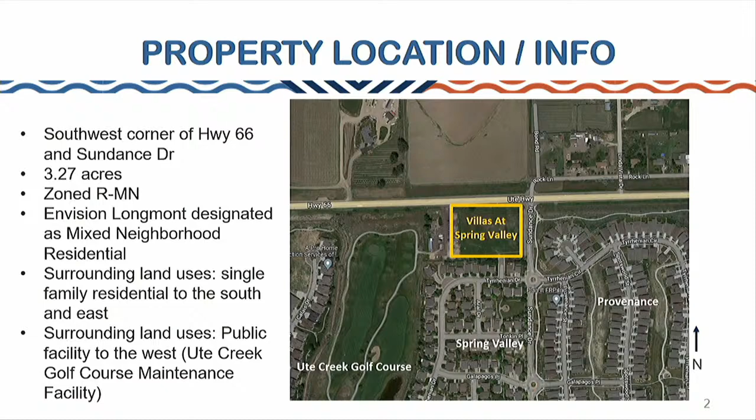Again, we're zoned residential mixed neighborhood. The original concept plan from 1999 called for 24 townhome lots, and you can see that concept up on your screen. That was with PUD R2 zoning, or at the time what was medium residential. In the current zoning district, we allow a maximum density of up to 18 dwelling units per acre. This project proposes 8 dwelling units per acre. Again, at 3.27 acres, they're allowed up to 58 dwelling units under the current zoning. This project proposes 28 dwelling units.

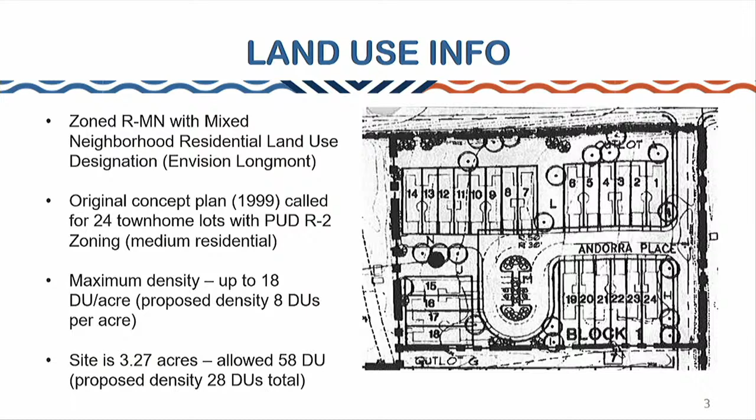So the request is for a preliminary plat of 28 residential lots for paired homes, so that'll be 2 lots to each one building. The lots range from 2,000 square feet in area to just under 3,000 square feet. In addition to the lots, we're looking at 17,000-ish square feet for a street that connects to Sundance Drive. At the end of that street is Tract A, which is a connection to the golf course maintenance facility. In addition to that, there's an open space tract going down the center. There's a landscape buffer area up to the north along Highway 66, and there is an internal tract, which is like the alley that they'll use for internal circulation.

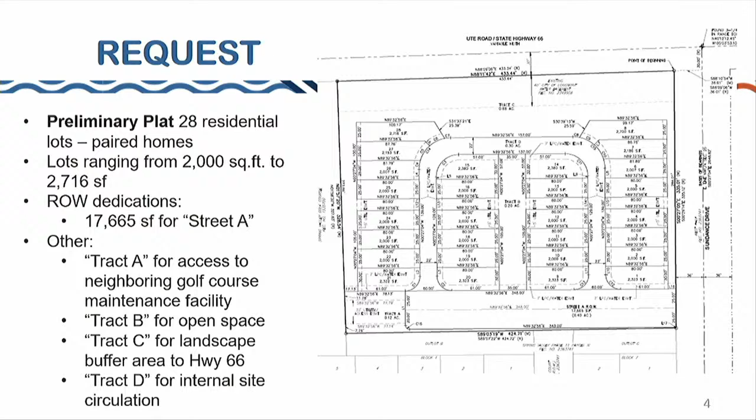Public outreach on this project: we had a virtual neighborhood meeting in September of '21. There were 3 attendees. In November of '21, we sent the notice of application for development. We did get comments from 16 members of the public on this notice. The vast majority of the concerns were specific to traffic impacts from the project. We again noticed the public hearing in October earlier this month, and with that notice, we did not receive any written comments from members of the public.

Development considerations from staff: we did find that the project meets the review criteria for a preliminary subdivision plat. The minimum standards for lot width are met. We don't actually have a lot standard for area in this zone district for this use. The proposed density aligns with the zoning, the comprehensive plan, and the previous original concept plan.

On the site, there's no federal or state protected species. I did want to mention there are a couple of raptor nests in the vicinity. One is an inactive osprey nest, the other is a red-tailed hawk that the species and habitat report didn't have any issues with or didn't expect any impacts. The other thing is there is inactive prairie dog habitat on the site, so if they develop between March and November, they'll have to provide a nest survey prior to coming in.

As always, you have three options to vote on this evening. The first is to vote to approve the Villas at Spring Valley preliminary subdivision plat. You can vote to approve with conditions, or you can vote to deny. This evening, staff is making the recommendation to vote to approve PZ Resolution 2022-10A to approve the Villas at Spring Valley preliminary subdivision plat.

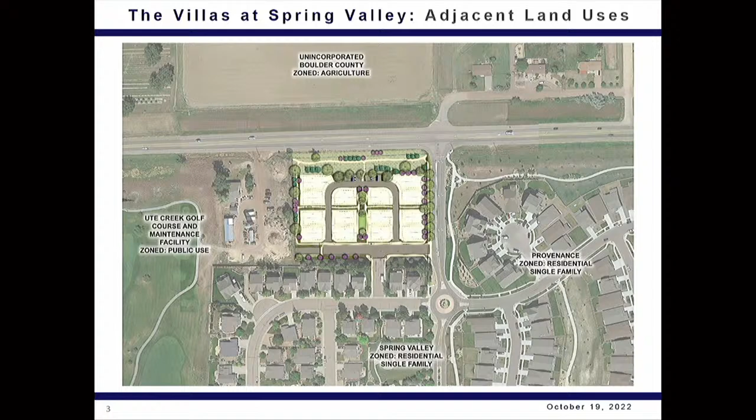A lot of this has already been covered by Zach, so I'll try to make this as brief as possible. As you can see here, we have another vicinity map for the site, located at the southwest corner of Highway 66 and Sundance Drive. Adjacent land uses: unincorporated Boulder County, agricultural to the north across Highway 66. On the west side we have the Ute Creek Golf Course and the maintenance facility, and to the south and east are single family homes in Provenance and Spring Valley.

The existing site conditions at the location right now: the site is 3.27 acres, currently undeveloped property, mostly unkept, covered in prairie grasses. As Zach said, there was an inactive prairie dog colony found. No mitigation was required except for the burrowing owl nest study if we happen to develop between March and November.

Going into the property, there's Aral Court from Spring Valley to the south, which dead ends at the south end of this site. This has existing water and sewer stubs that we plan to use for this development. Current zoning is residential mixed neighborhood. The proposed single-family attached is an allowable use for this zoning, and the allowable density is 6 to 18 units per acre.

Jumping back to the site plan, we are proposing 28 single-family attached homes. The maximum allowable number of homes would be 58 units in the residential mixed neighborhood zoning. Each home is planned to have a 2-car garage. There are 13 additional guest parking spaces along the north side of the alley, which is the Street B right-of-way. We have 1.08 acres of common area open space between outlots B and C, so that's quite a bit of open space for the site area.

Right now we have planned walking trails and sidewalks all around the perimeter of the development. All of the planned units will face east and west. Units on the east side will front Sundance, and the remainder will front open space either in the center or on the west side. We will also have a large landscape setback from Highway 66, which is part of the Highway 66 corridor requirements.

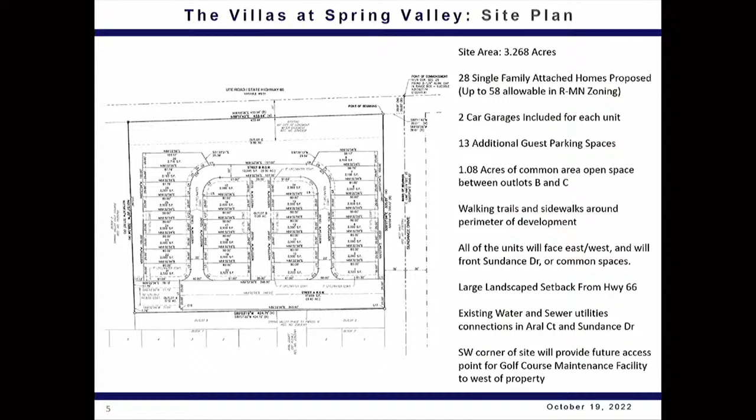There are existing water and sewer utility connections in Aral Court and Sundance Drive. We also plan on making a water connection in Sundance to loop that connection. The southwest corner of the site, as previously mentioned, will provide future access for the golf course maintenance facility.

So here's just a landscaped illustrative concept plan. You can see that we are trying to emulate what Provenance is doing across the street as far as the open space concept. We'd like to have the perimeter walking trails and path with the central open space area. This is sort of the way Provenance put their design together, and we like the aesthetics and functionality, so we're trying to emulate it with what we have.

You'll also notice that on the south end of the site, there's an existing 30-foot landscape buffer between the rear of the existing lots in Spring Valley and the right-of-way for Street A. When you incorporate Street A, there's an increased setback distance of 80 feet before you hit any lots.

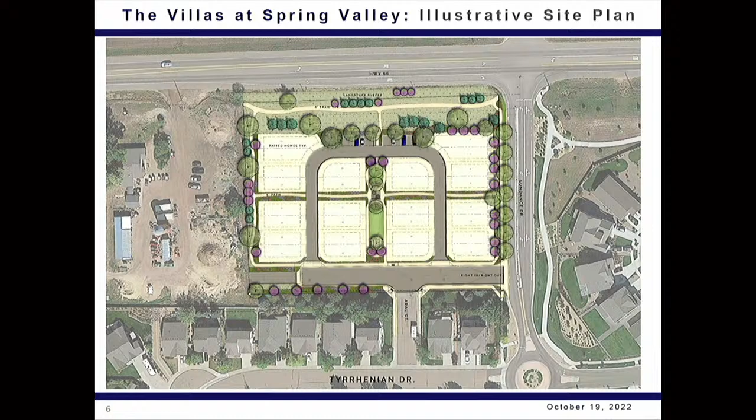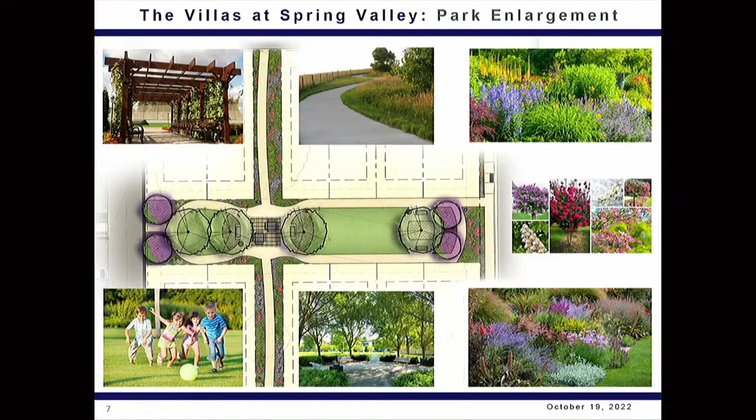This is an enlargement for the current planned Central Park. Right now, the plan is really to incorporate some shaded seating areas between the trees, a shaded pergola, places to sit down, and a small open grass playfield for kids to play in. We really want it to be green and vibrant, have a lot of pretty landscaping, places to hang out, sit, walk your dogs, just make it feel like an inclusive center space for the community.

Zach went through pretty much all of this, so I won't take too much time, but as far as the review criteria goes, we are consistent with the comprehensive plan, zoning codes and ordinances. The 28 homes at a density of 8.5 dwelling units per acre is consistent with the residential mixed neighborhood zoning. Up to 58 units would again be allowable at maximum density. Individual lot sizes and setbacks are consistent with the standards. We have a 50-foot landscape gateway buffer in the Highway 66 mixed-use corridor, and the proposed development is overall consistent with the comprehensive plan.

As far as compliance with the applicable city standards, we do have a right-in, right-out access proposed to Sundance that required an exception. This was because we were just barely short of the distance requirement from the Collector Street entrance. We also have drainage and utilities; the connections proposed and usage are in accordance with city standards.

Again, the application is compatible with surrounding property in terms of land use, site, and building layout and design and access. The paired homes provide a transition in density and land use from the Highway 66 area into the surrounding single family. This is, we believe, a natural progression from smaller lots into the bigger lots to the south and the even larger lots to the east.

An existing neighborhood buffer along the southern property further enhances the compatibility between the neighborhoods. It provides a landscape buffer that's already in place. The proposed access road to Aral Court and Sundance Drive will provide additional separation between the existing homes and new lots, and also direct the majority of the traffic flow coming out of the neighborhood directly onto Sundance.

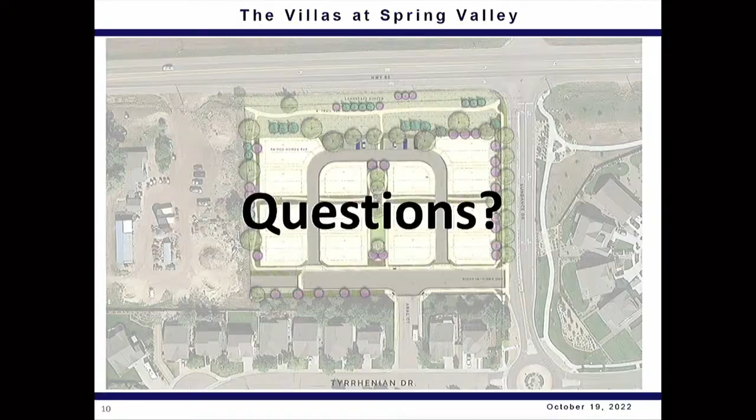Let's see. I had another one.

Oh, and just wanted to point out that many of the concerns we received in writing from the neighborhood had to do with the prior configuration where the alleys were going the other way. Now the configuration of the alley that loops around does not have any of the houses backing up to the south subdivision. So that's been improved. The developer listened to the input and changed the plan, and I think that's good. So in general, I really like this project, and I hope it goes through. Thank you.

Thank you, Chair. I have a question regarding the alleyway, and I'm not sure to whom I should address this. Is it a private alley or is it a public alley? How will it be maintained?

Thank you, Commissioner Flake. It's a private alley, and the portion of the street below it to the south is public. And I assume utilities are within that alley area? Yes. And if they're public utilities, by whom would those utilities be maintained since it's a private street? The city will have permission to go into the private alley to maintain the public services. That's correct. And what services, aside from sewer and water, will be in that alley?

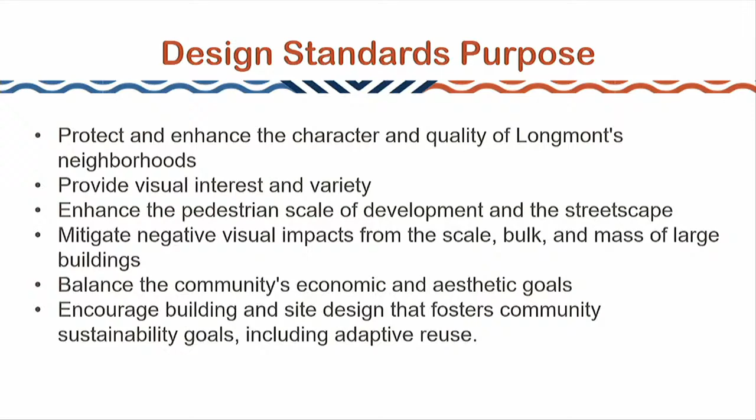This next slide shows some of the current graphics we have in the code, which help address key standards when reviewing mixed use and non-residential design standards. They address things such as site layout, building entrances, building articulation (both horizontal and vertical), roof and parapet design, transparency, building materials, and colors. The goal is to have buildings that are engaging to pedestrians, as well as provide architectural interest and variation.

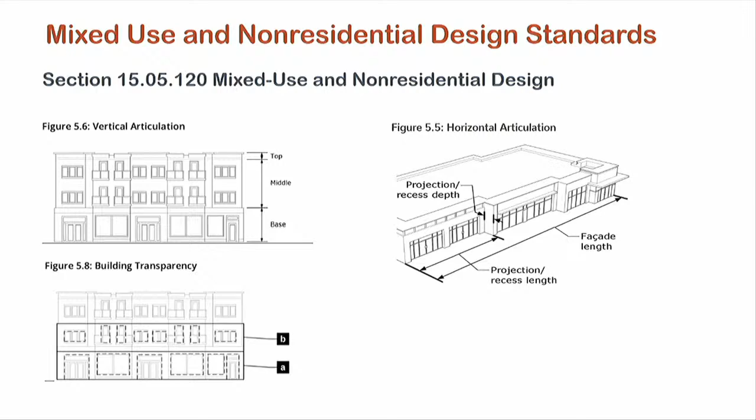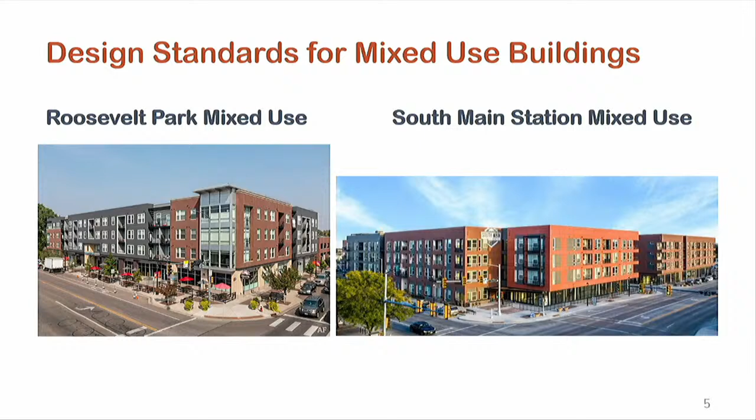So you've probably seen these buildings around town. These are just a couple of examples of vertical mixed-use developments that have incorporated most of the standards updated in 2018. A couple of these projects were constructed, or at least started construction, before 2018, but for the most part, they incorporate those types of design standards, creating a more pedestrian-friendly, urban-style design.

And this is just an example of some of the more recently constructed commercial development in our community that also have incorporated most of the standards that are part of the mixed use and non-residential design standards. You've got the Harvest Junction Commercial Center, Village at the Peaks.

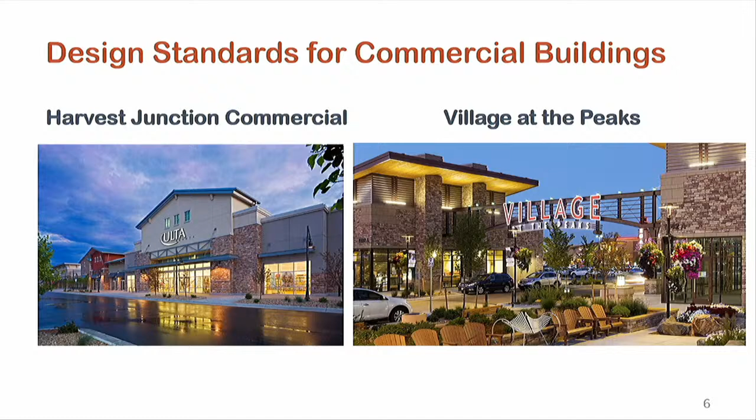So then we move into industrial building design standards. Industrial buildings, on the other hand, tend to require different design features in an environment that is less pedestrian focused. Typically, industrial buildings are larger with different functions than mixed use or commercial buildings. Buildings on their front do include offices and customer entrances, but window and door openings are typically more limited because of storage and manufacturing operations that occur in large portions of the buildings. These buildings are typically located in industrial park settings that are serviced by trucks with limited amounts of pedestrian access.

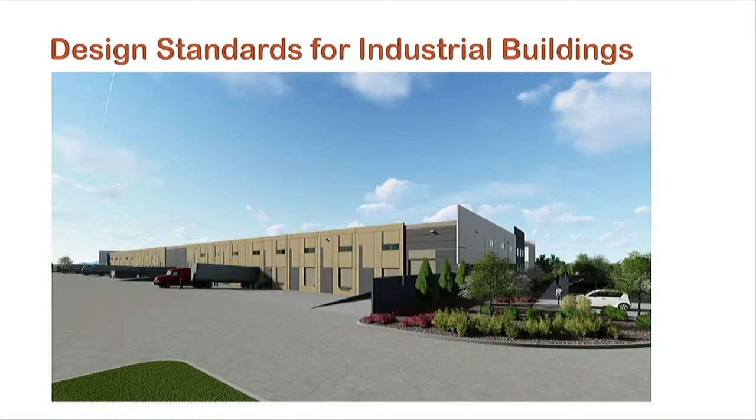So I'm going to talk a little bit about the proposed amendments that you have in your packet. Staff has received some input from industrial building developers. As we've gone through the review process for reviewing industrial buildings and looking at our current standards, we've come to the conclusion that there's frequently requests for modifications or variances to particular types of standards or design standards for these industrial buildings. So we've come to the conclusion that it would be appropriate to consider amending the code to create some more flexibility for industrial buildings.

So the intent of the amendments is to acknowledge that industrial buildings have a different form and function, and that typically dictates more flexibility in terms of building design. Staff discussed the preliminary draft amendments with City Council this past August, and Council proceeded to direct staff to proceed with the amendments. That's why we're here this evening, to talk with the Commission to get your input, see if you generally concur, or if you have any suggestions. We're certainly open to any input that the Commission may have before we finish drafting the ordinance for Council's consideration.

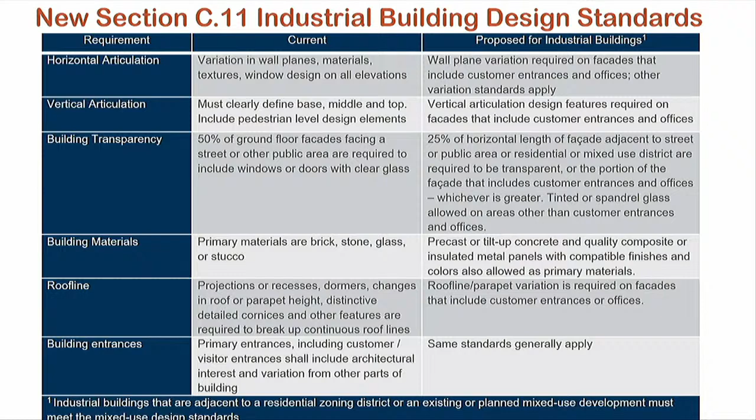Thank you, Brian. Looking back under General Design Standards C-1, site layout, I wouldn't make this comment except that I noticed throughout the document you're updating and modifying things, so I thought I would discuss this part. Under B, compatibility with adjacent development, I noted that under Roman numeral 4, areas and access for refuse and recycling collection, and I thought as long as you've gone that far, we should also address loading docks, particularly adjacent to residential development.

Because sometimes we aren't clear enough and we end up with funny situations where you have a loading dock and they figure, oh, 150 feet is enough, and then there's a residential development area. And it's never enough, because loading docks don't operate under normal hours ever, and you've got the lighting and the noise and everything.

So ideally, I would say they must be at a 90-degree change with a buffer wall—some type of screen wall, additional landscaping material, whatever that might be. Usually if it's facing away on a different side of the building, then the residential area is far more protected. They're not going to be totally protected—those things are noisy and bright, and they certainly can be.